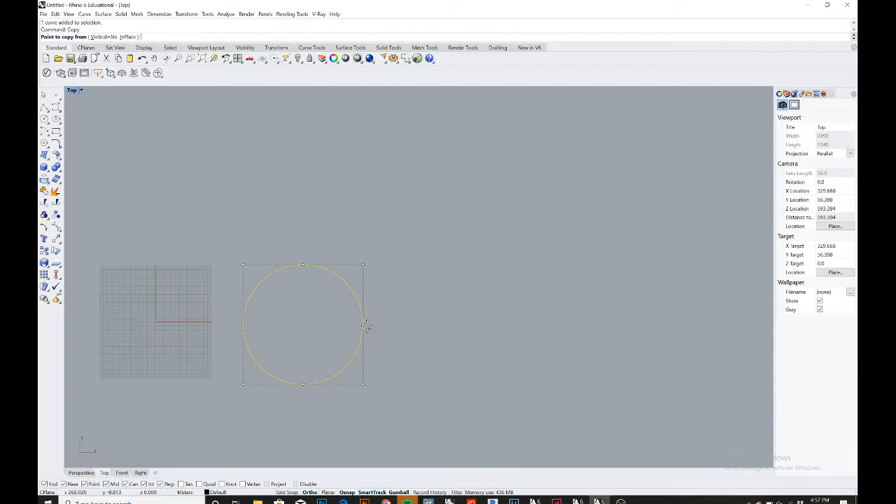And I'm just literally going to copy this 4 times, because I want to have 4 of these circles. I know I'm doing this off the grid, it's alright, don't freak out. Also, we're in top view if you didn't notice that.

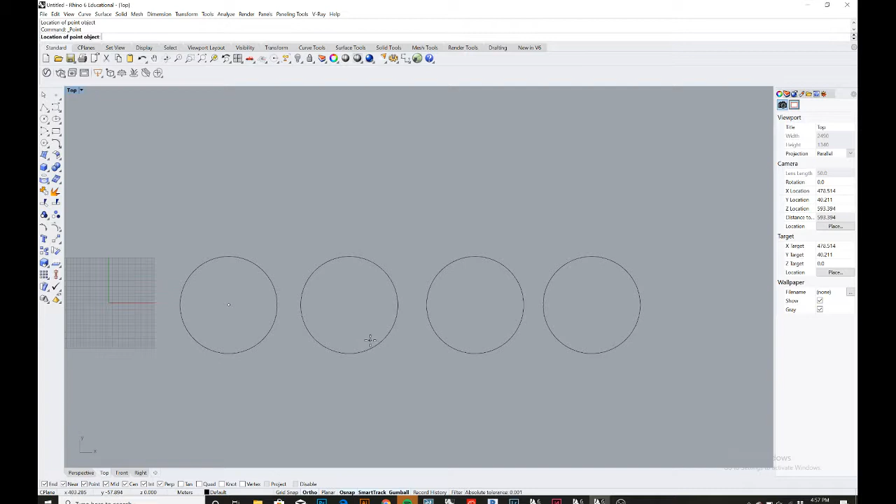Okay, but we might change that around later. Alright, so we have that, and then I'm just going to put a center dot in all of these. If I have my snap on down here, it says center is checked, I can just come in here and hover my mouse around the edge, and it'll want to snap to the center every time. Also, I'm able to do this fast - if you didn't know, if I right click on the mouse, it will just repeat the same command, so I don't have to type in or go over here and click on the point every time. I can just right click.

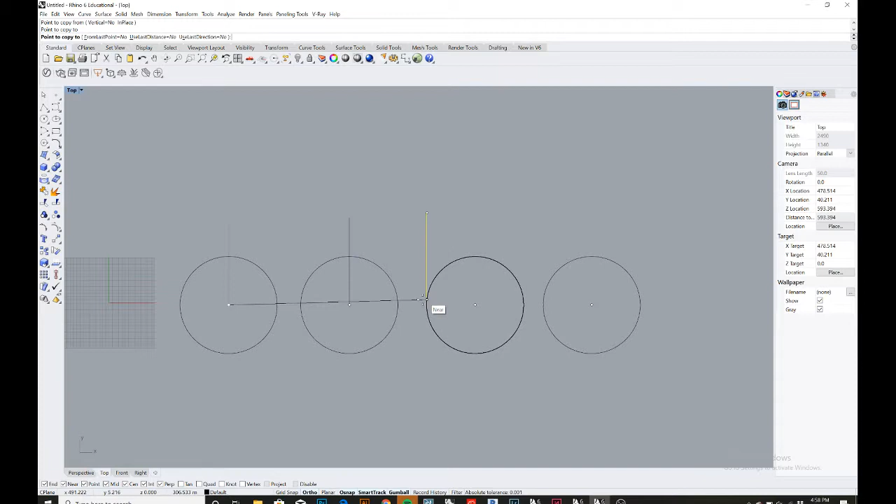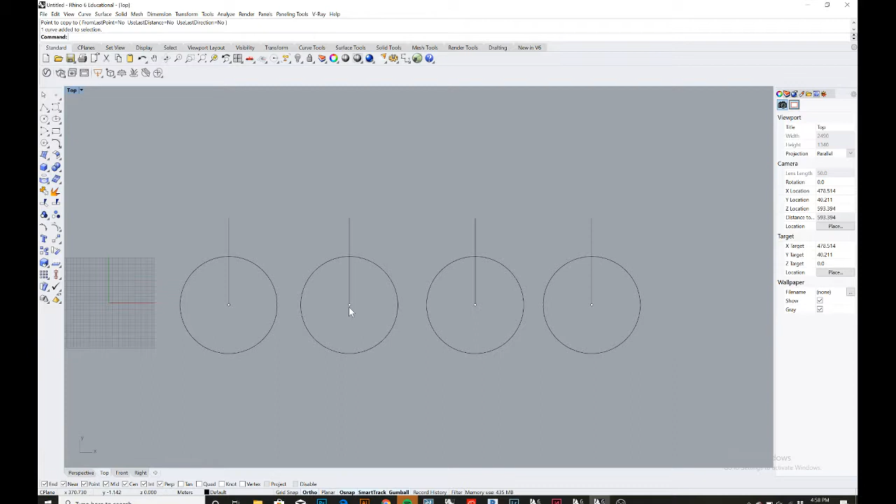Alright, now that that's done, I'm going to draw a line just straight up on all these, and then I'm going to copy this same line over. I like to overextend the line past the circle, just because my ortho needs to be on - that draws a line perfectly straight up and down. With circles, I don't like drawing straight to the edge, because sometimes I might have misclicked and it's not actually perfectly up and down even if my ortho is on.

So it's just a precautionary thing that I do. So then I highlight all this, and then I can just trim this all like that. I just type the trim command, highlight everything, and then select the part I don't want.

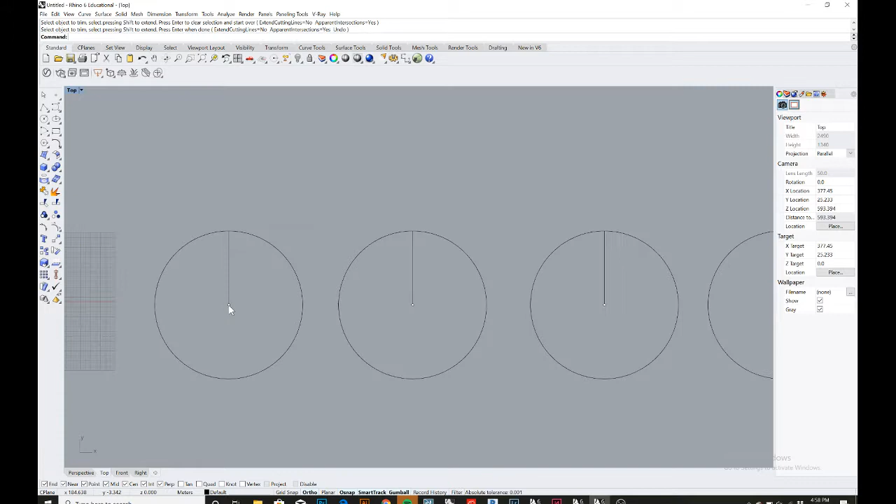Alright, so now we're gonna start messing with these points. So actually, we want 2 points because we're gonna move our lines around. I'm gonna Control C, Control V to copy and paste, and for each one it's gonna be slightly different. For this point, we're gonna move it to the left 3, so I'm gonna type in -3 by just clicking on the red arrow. It's gonna move it a little bit that way, not by much, and then I'm gonna move it down 12.5, so I can type -12.5 to move it down. So now we just have a point over here floating.

And for this one, it's just going to be to the left by 7, so I type in -7. Cool. If I want, though, I can Control C, Control V, so I can keep that original point. That way now I have 2 points. Control C, Control V - that's just copy and paste, by the way.

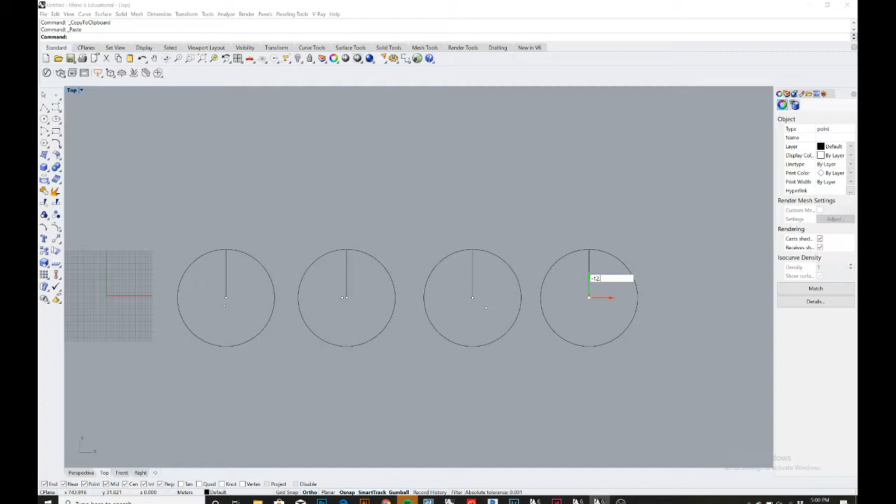And we're going to move this one to the right 21, and down 15.5. Whoops - negative 15.5. Alright, and for this one, we're just going to go straight down, Control C, Control V, straight down -12.5. Awesome.

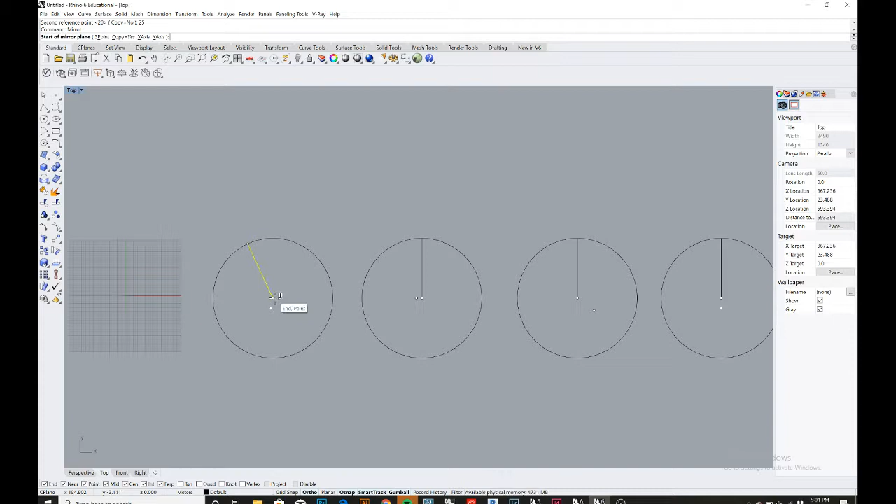From here, I'm just going to rotate each of these. We're going to make basically like slices in each of these. So right away, I can just type in rotate. For the first one, we're gonna click the bottom, click the top, and now just move it to the left, but we're gonna do an angle of 25 degrees. And then I'm gonna mirror that straight up to get a total of 50 degrees.

And then I'm going to join these temporarily. I can just highlight them - I can either click on this or I can type in join.

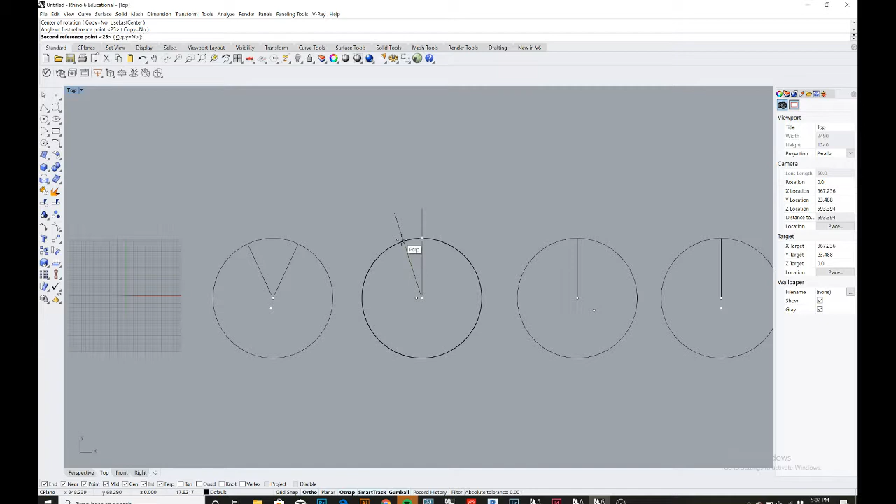For this one, we're gonna type rotate again. This is different than if I used the gumball to rotate it. I'm gonna type it in, click the bottom, make sure I'm clicking the actual top point, and then I'm gonna rotate this one 20 degrees. Same thing, I'm gonna mirror it for a total of 40 degrees. Highlight it, join it. Okay, we'll get to why there's another point over there later.

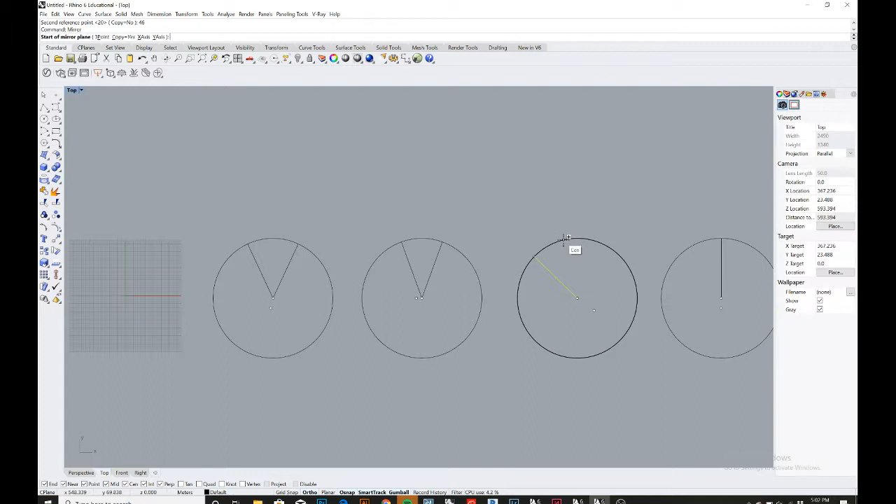Top, bottom. Going to rotate this one way bigger, it's 46, and then mirror it. So a big angle. And then the last one, going to rotate it just 25, and then mirror it, so we have 50.

Okay, make sure these are joined. Alright, so the reason why we're doing that is now we want to move the vertices of these triangles to that new point. We probably have to turn off gumball for this because it's going to get in the way, but I can just click on this point and drag it to where I want.

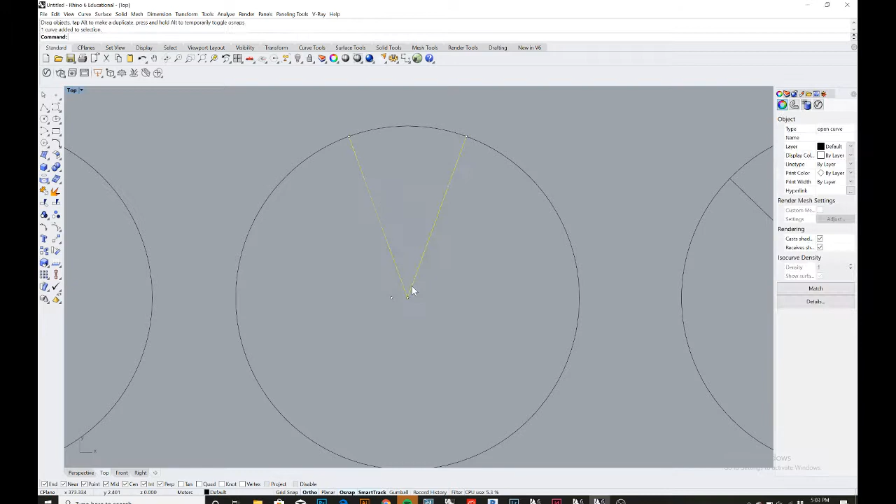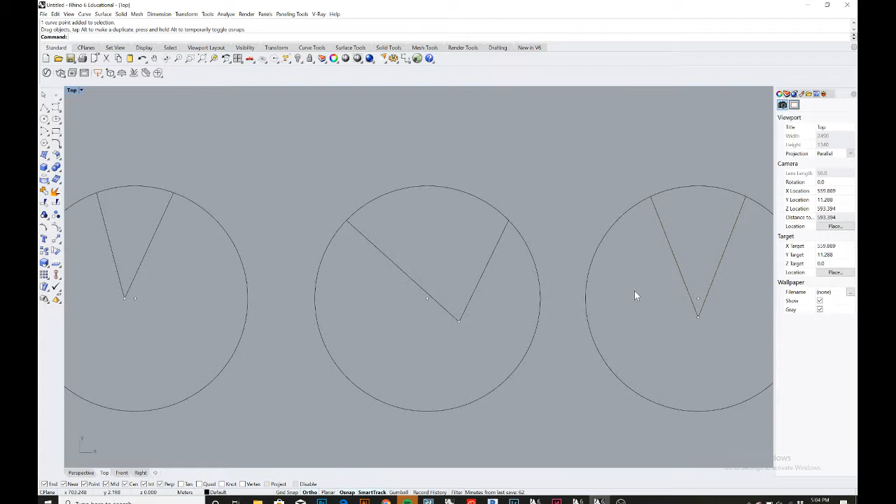Drag it. Just like that. And I think, yeah, that's how it goes. Okay. All right.

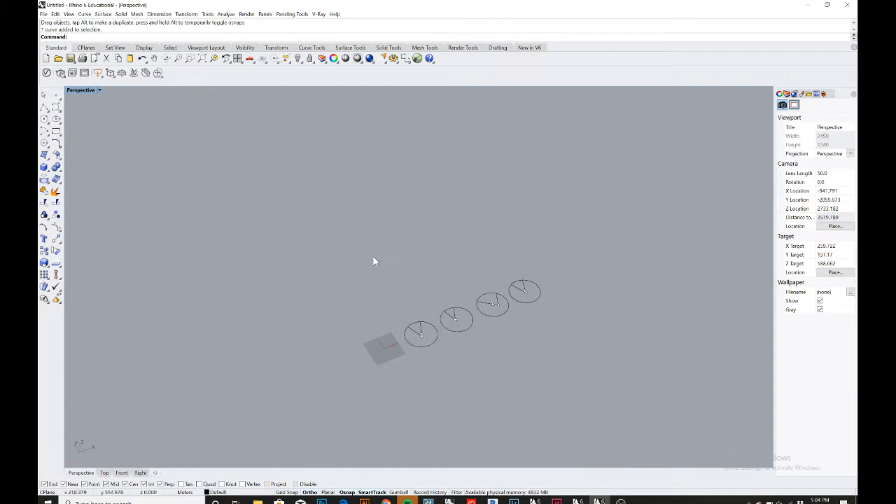And then if I look at this in perspective, I actually want to rotate all of this with my gumball. Now I can use gumball and just rotate this forward like this.

And now we're going to click on these lines. We're going to extend them past so there's intersections. So actually if I highlight all of these and then explode them, and now if I click on them, I want to do scale 1D because we're just going to extend the lines basically.

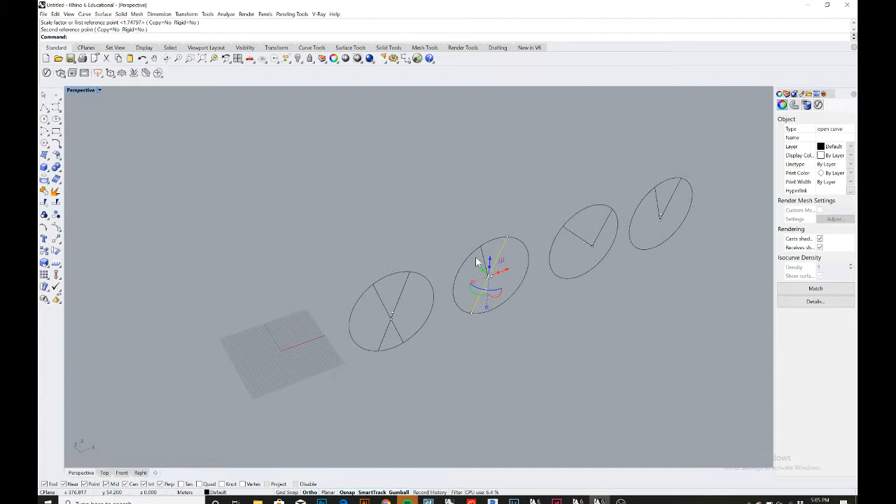Just like that. So how to do that is we make sure we have scale 1D, click the top point, bottom point, and then it should just follow its path like this. Alright.

So I'm just repeating the same thing for all of these. Scale 1D, top, bottom, extend, top, bottom, and extend. Alright, now we want to go back to our circle tool.

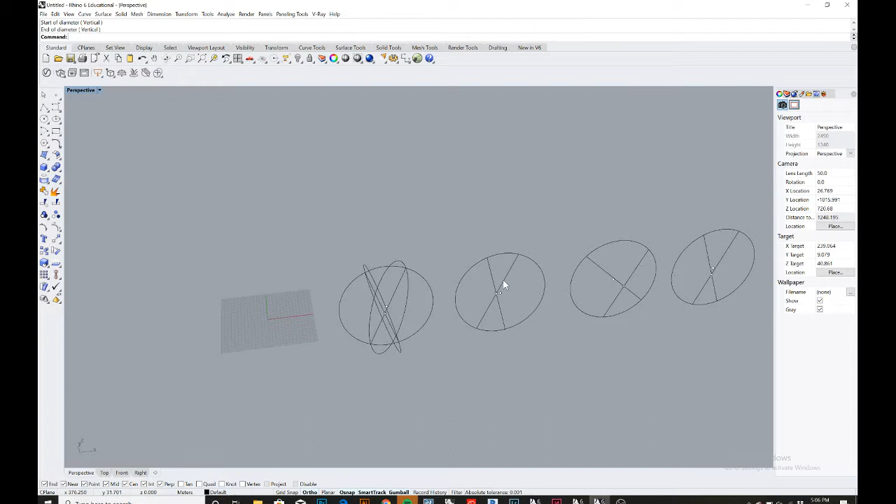Find the one that's by diameter, and we're going to draw these circles in here, like this, basically making a sphere, but it's going to help us trim later. Okay. That's why we rotated these, we extended these lines so it's easier to draw these circles inside. Alright.

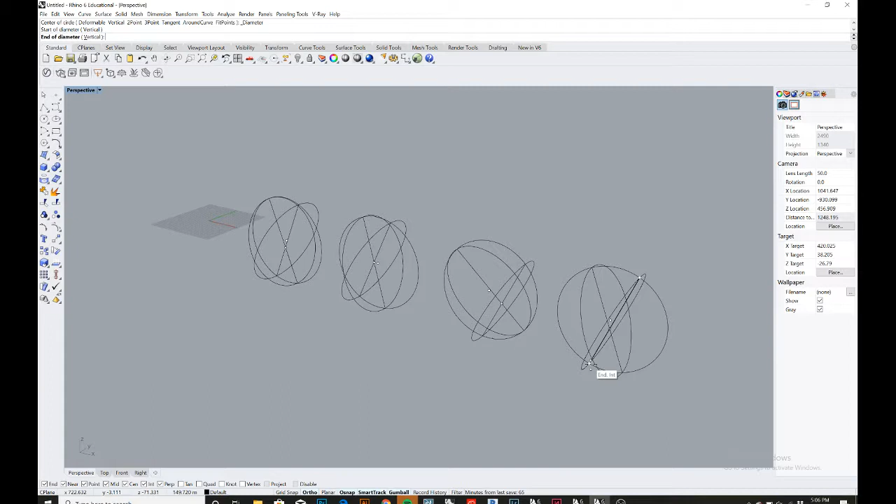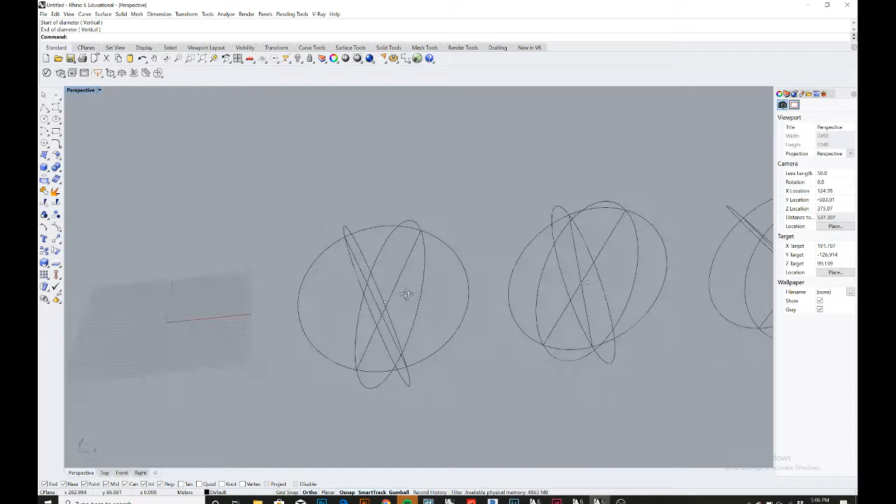Alright, now that we have that, we're aiming to just get a piece of this. It's a little bit confusing, but I'll just show you with the first one, like what the goal is.

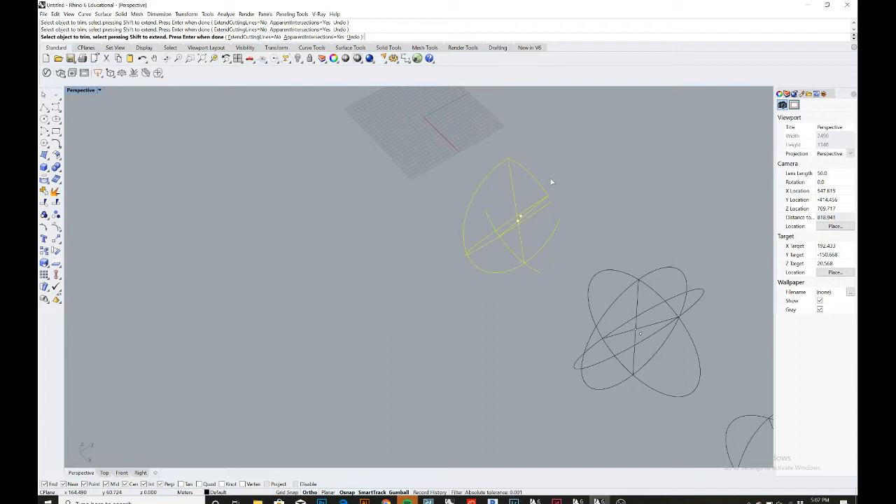If we highlight all this and then type trim, and then we go in and we get rid of that, get rid of that, get rid of this, get rid of this. We're just trying to get a wedge basically. Okay.

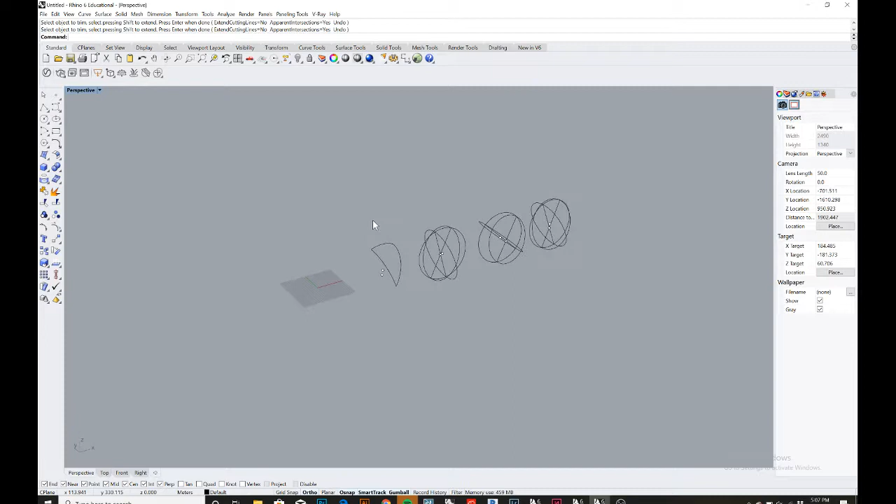Cool. So this is like, yeah, we want to trim until we get that sliver right there. And then we want to make that a surface. So if I go to the surface tool and then click on surface from a network of curves, I can just click on this, click on that, enter, and it will just make a surface based off those curves. So we want to do that for all of these.

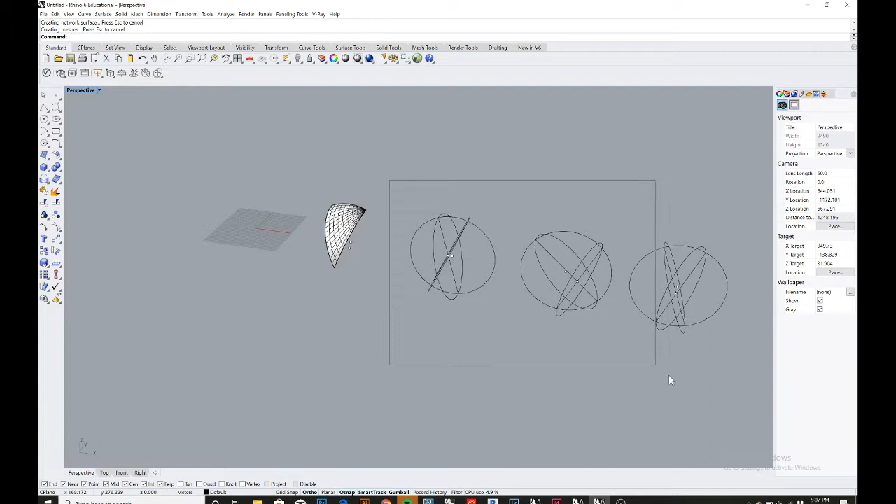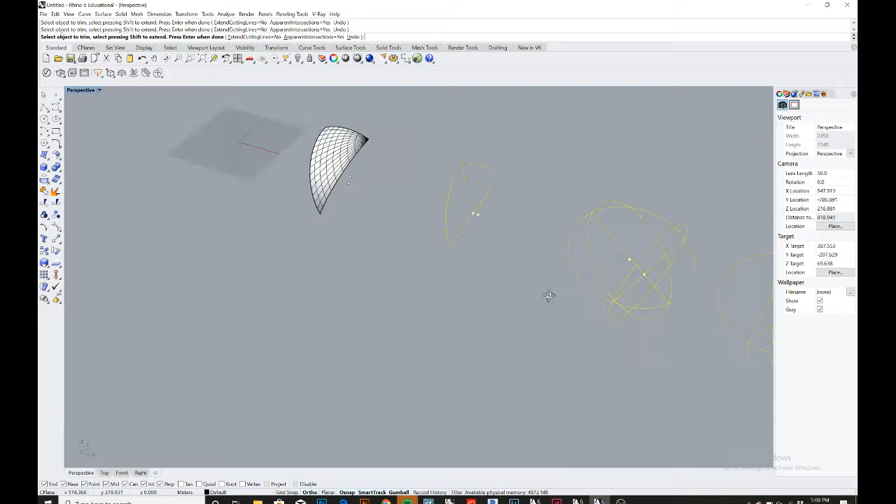So I can probably just highlight all of this and then just go to town, cutting away what I don't want. Don't want that, don't want that, don't want that, not that, not that, none, none, none. Okay.

Yeah, so we got that one done. This one's gonna be really big. So this one is cut like this, I believe. Yeah. Right there, where that intersection is. Cool.

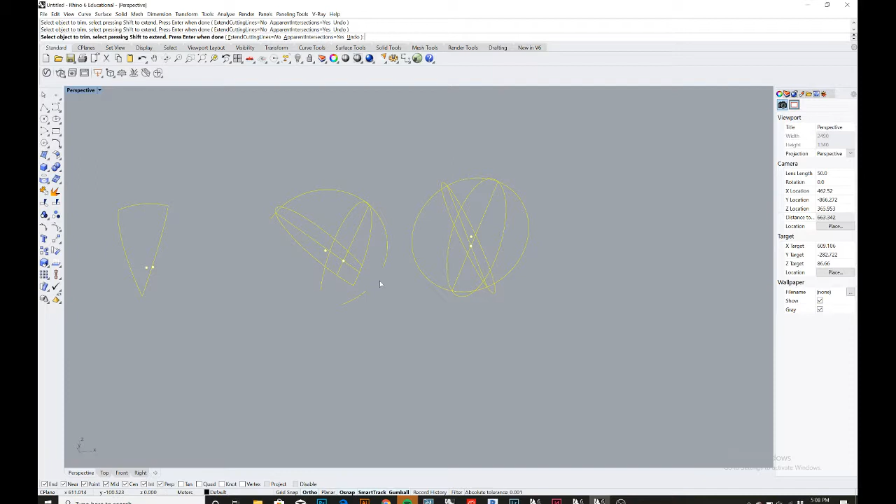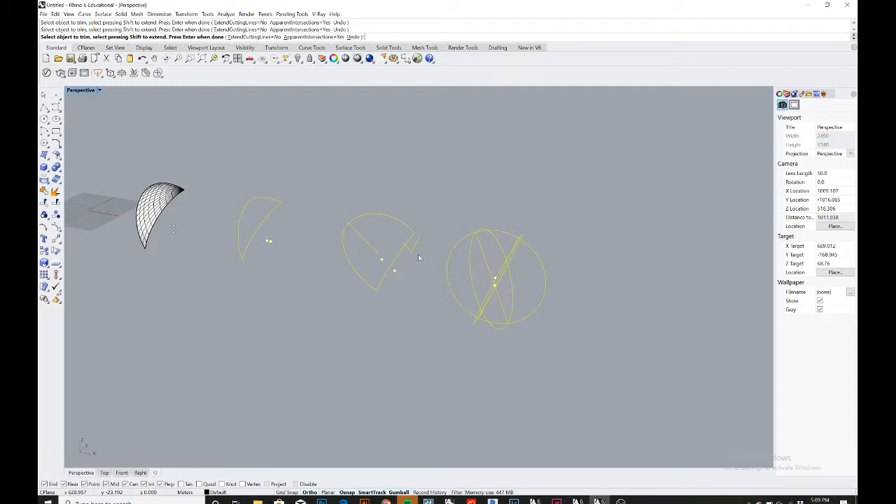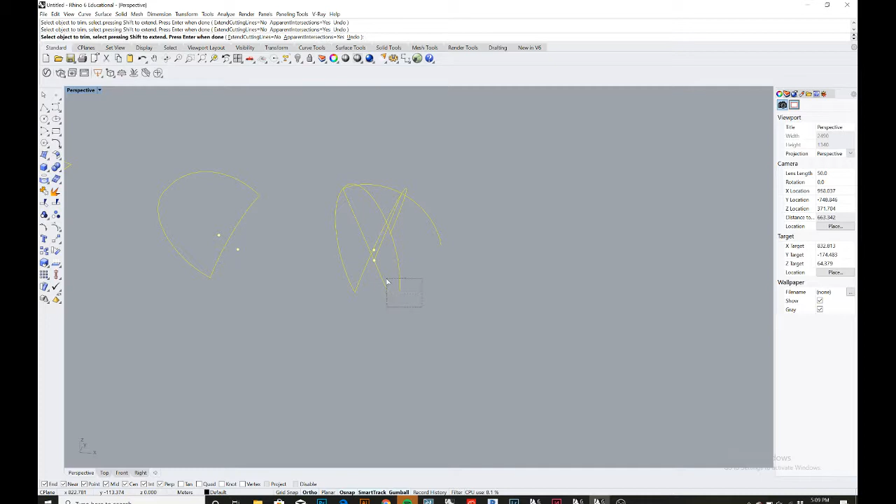Almost done. It can get really confusing, so this might take a couple tries. You might have accidentally deleted a part that you don't want to delete. Just Control Z it, that will help. But there you go. So that's a big wedge, and then now we have this skinnier one right here. Okay.

And that should be... make sure we don't have these little nubs. There we go. Cool.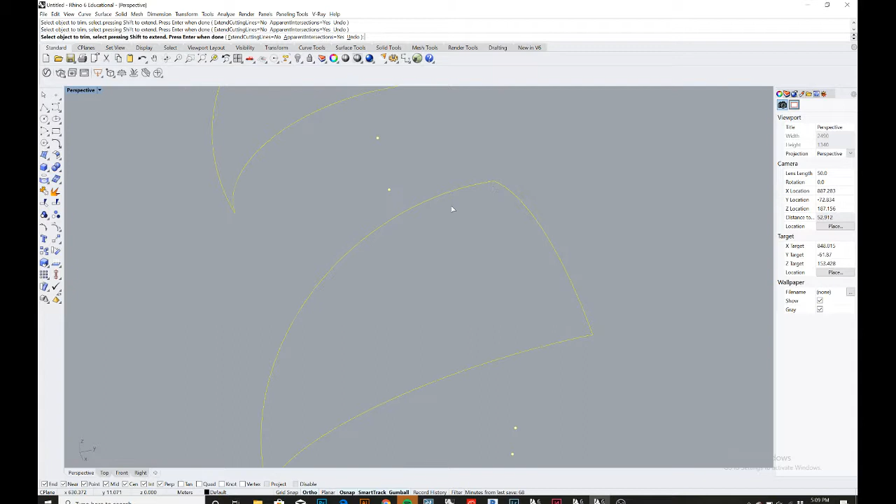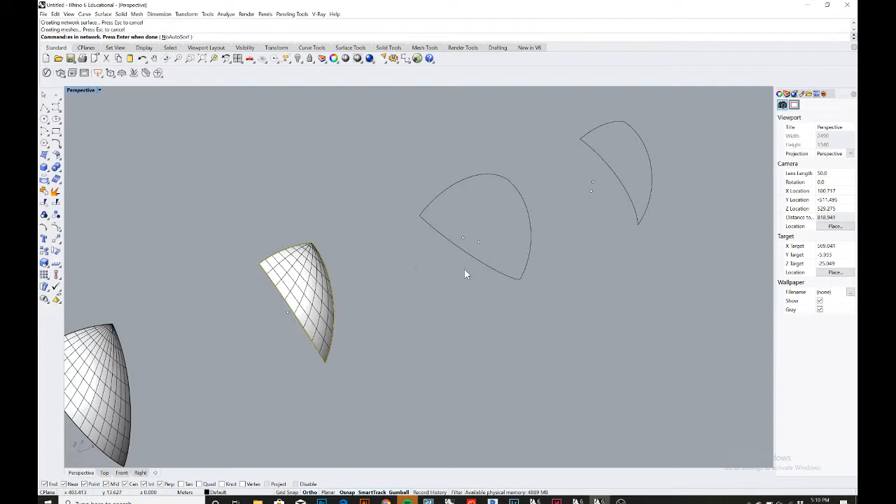That is all done. So now we're gonna make the surface like how we did earlier out of all of these. Surface, the curves, click here, click there, enter. If I right click, I can repeat that. 1, 2, 3, enter. Repeat it. 1, 2, 3, enter.

Alright, now what we do for all of these, I can literally do it all at once. Click them all, and I'm just going to rotate them kind of backwards 25 degrees, and I can do this with Gumball. I don't need to type rotate. I can just click on the red arrow and type 25, and they're just going to rotate like that. That's all it is.

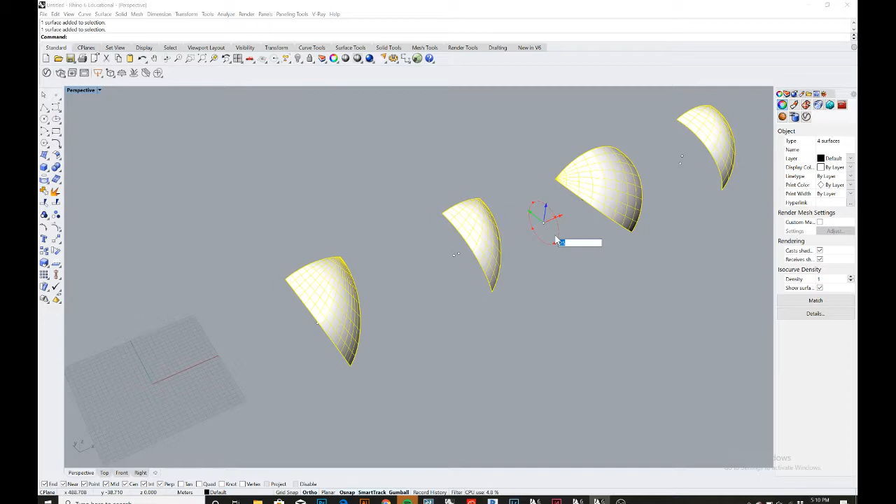Alright, these lines are confusing. We can move these away. We can just pull this forward. Alright, and then...

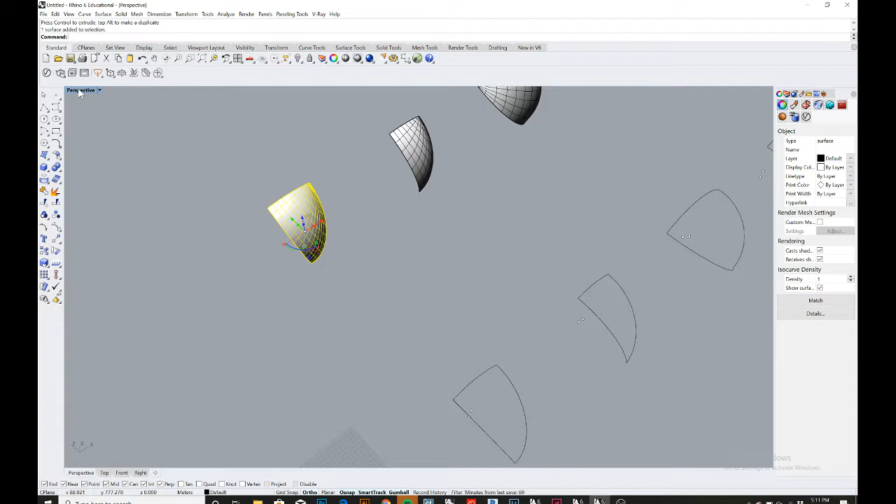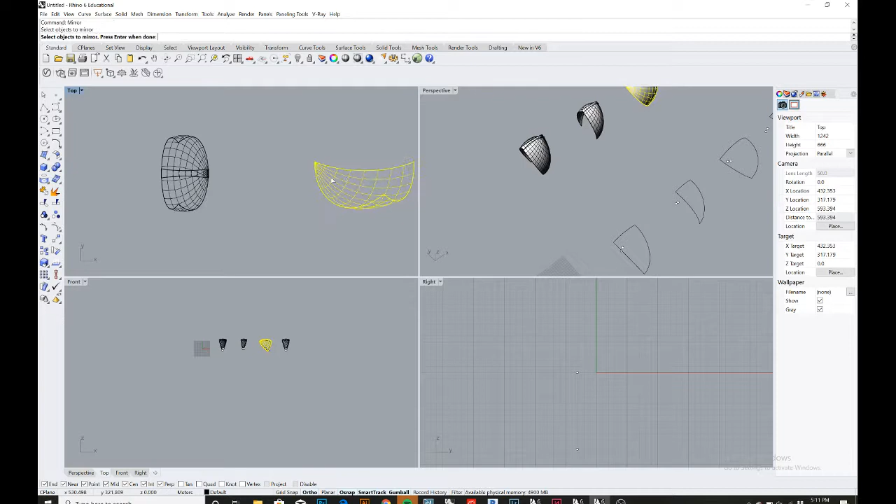Now if I look in top view, this would be easier. We're going to mirror all of these over to make more complete shapes. So if I type mirror, I can go like this, just rotate it over, like this, mirror it over, and rotate it. We want to make sure there's no gap right here, so if there is, we can just move it until there isn't one. There we go.

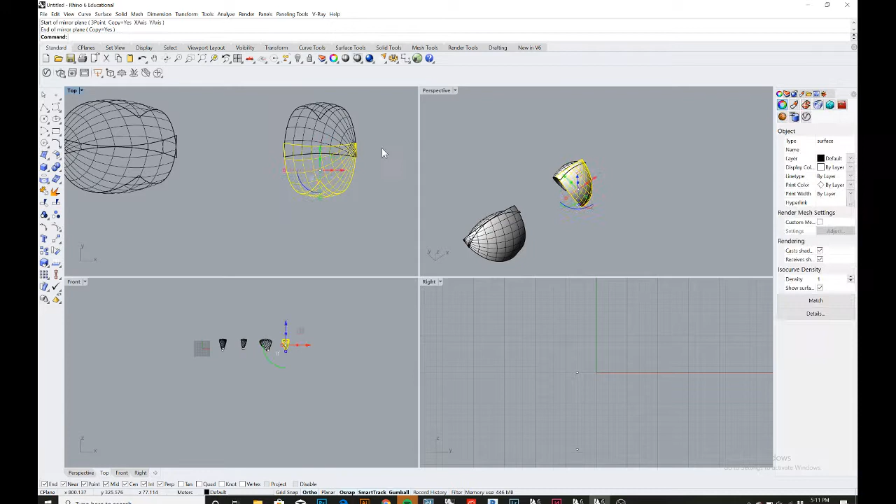And then let's get a better look at this one. Okay, type mirror, and like this. The reason I'm mirroring it so far down is that way there's not any holes. So there's going to be slightly gross looking overlappings like this.

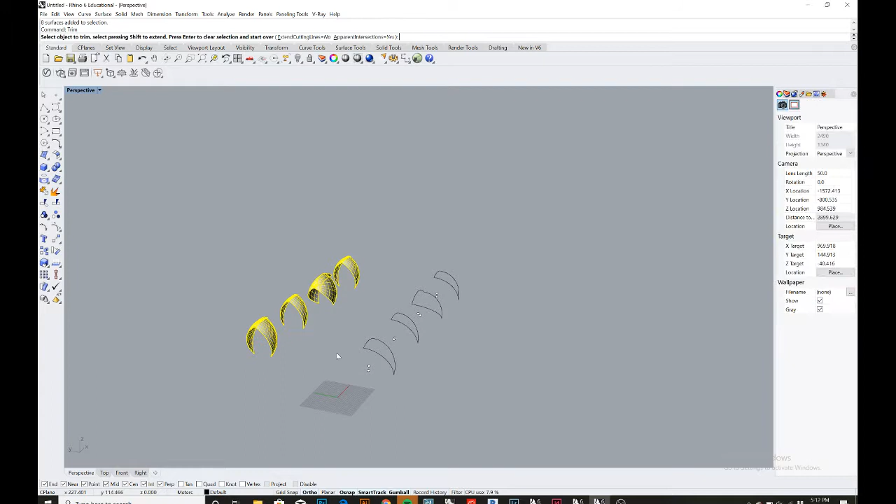But if I highlight all this, I can type trim and get rid of all this excess stuff. It's going to get rid of all these fins that are sticking out basically. So they should be pretty clean by the time you're just cutting off the excess.

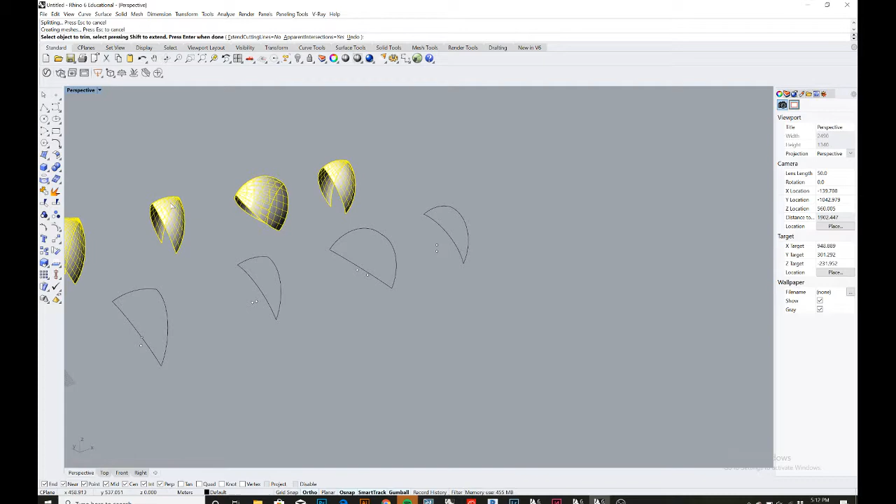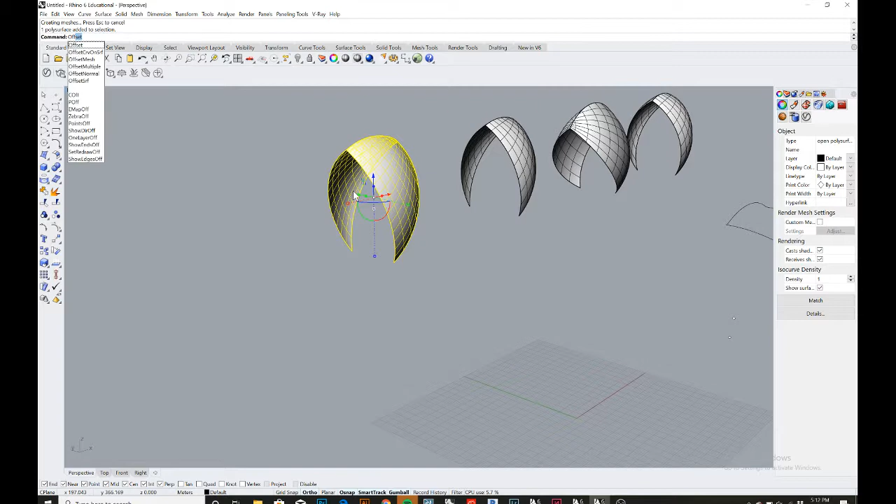Cool. And then if I select this, I type join. Cool. And then now we want to offset the inside surface, because basically we're adding thickness to it. So I do offset surface and make sure the arrows are pointing inside. Make sure our distance, if I go up here and click on distance, it's 3, and I just enter, and it just added some thickness to it.

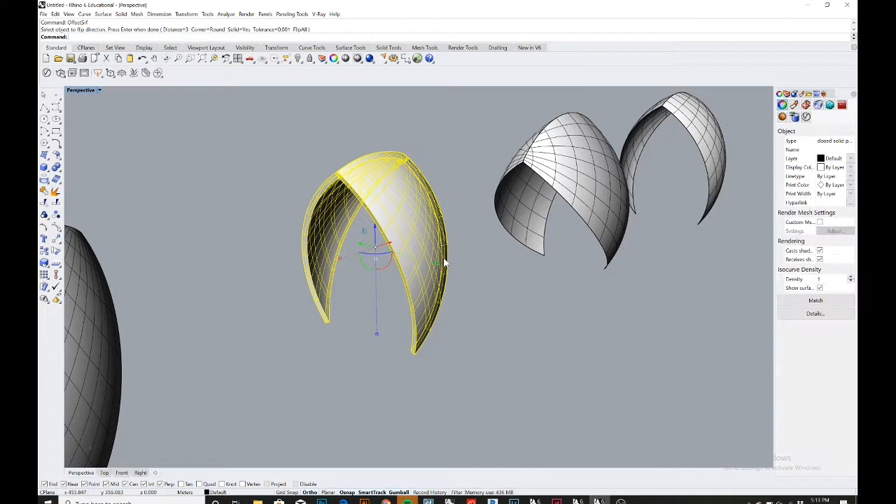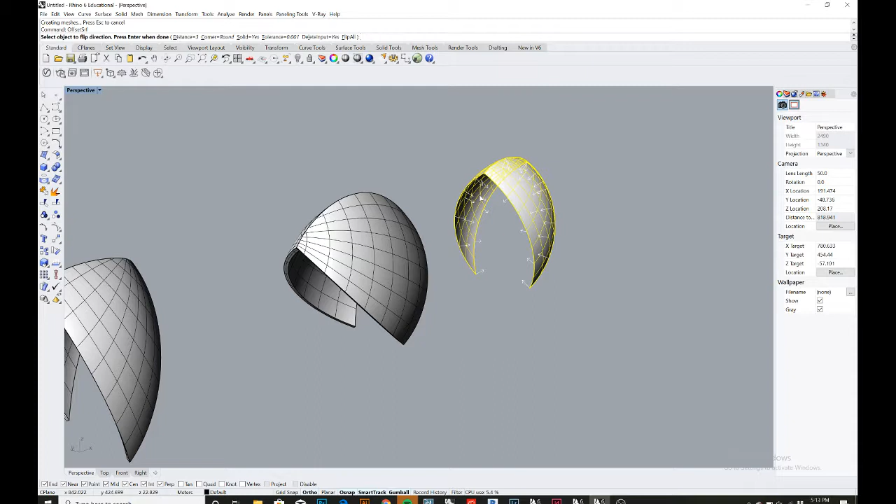So make sure these are joined first. Join, offset, surface, inside, enter. Make sure these are joined. Then offset, make sure it's the inside. By clicking on it, I can just change the direction. 3, cool, that's good. And then same with this. Join it, offset, it's already inside, enter. Alright, now that's perfect.

And now I can bring these closer together to create the shape that we want.

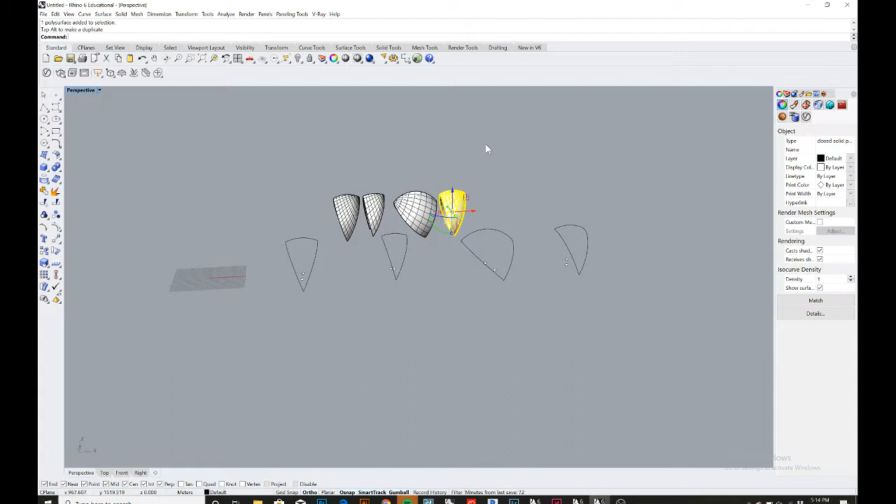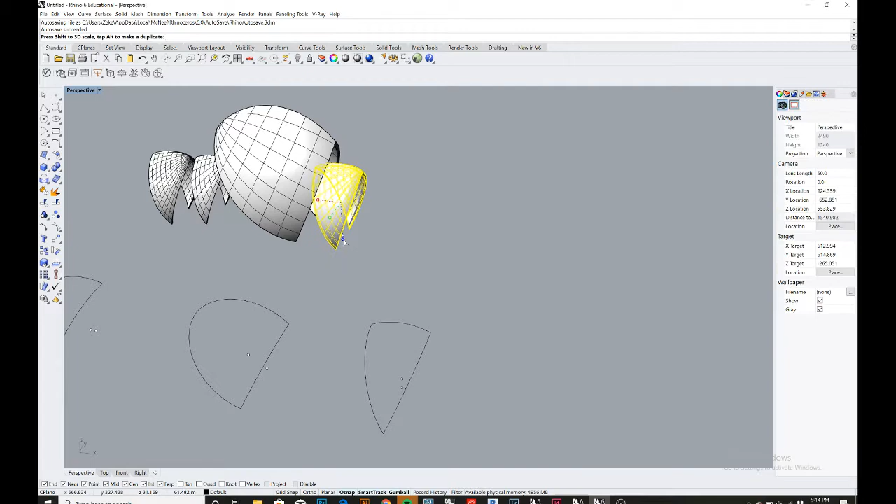And the Sydney Opera House is like, the shapes are changing in size. So if I wanted, I could just scale these up to make it look more realistic. I could lift this up, I could slightly make this bigger, can make this one slightly smaller, this one's slightly bigger. But you can just mess around with it and try to figure out what looks closest to the actual picture or whatever.

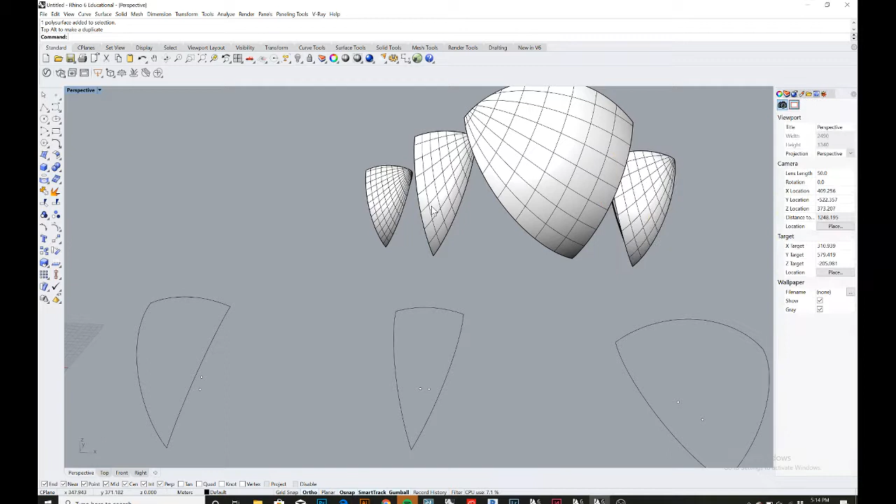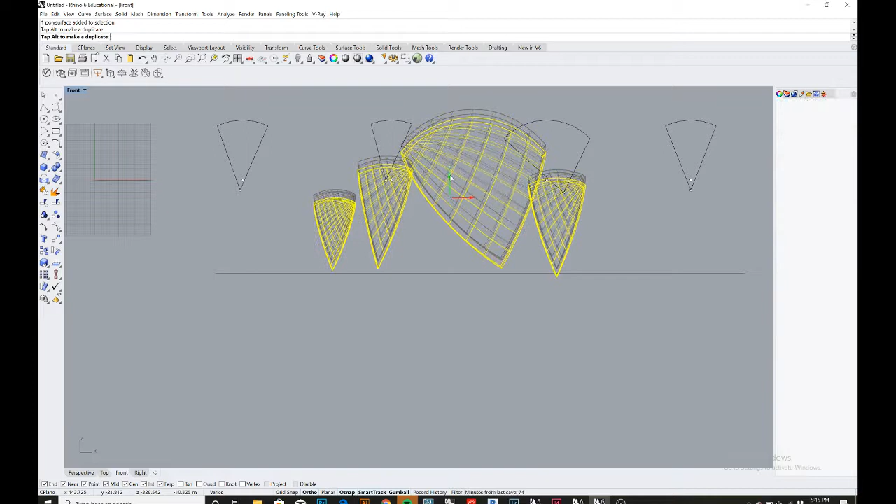Move this over a little. And then if I go to a side view, we can make sure that all these are somewhat actually on the same plane. So I can just draw a straight line, select all these shapes, move them down, and then we can just get them as close as we want to this line, making sure they're all lined up on it. You don't really need to snap it to it because we're going to make a ground that's going to cut off some of this anyway. So, something like that.

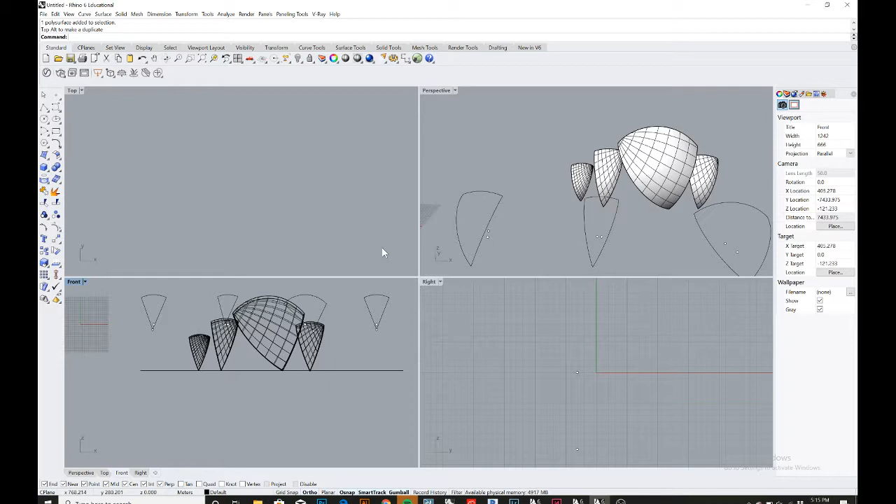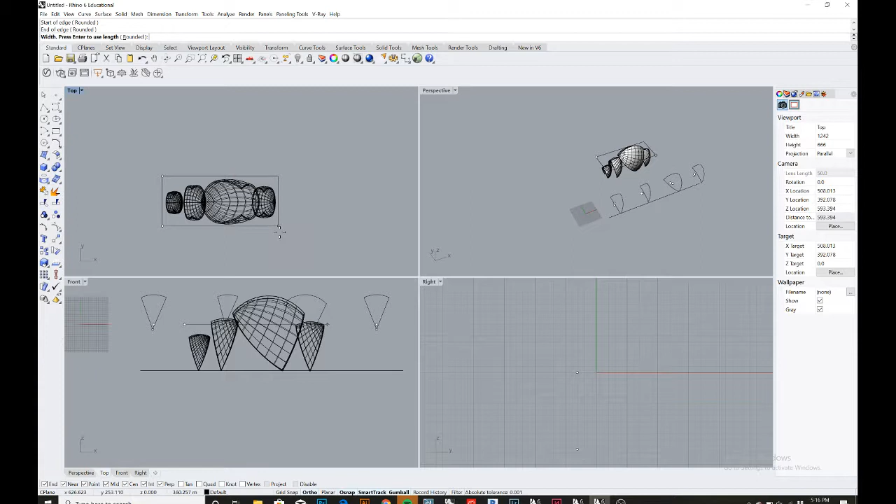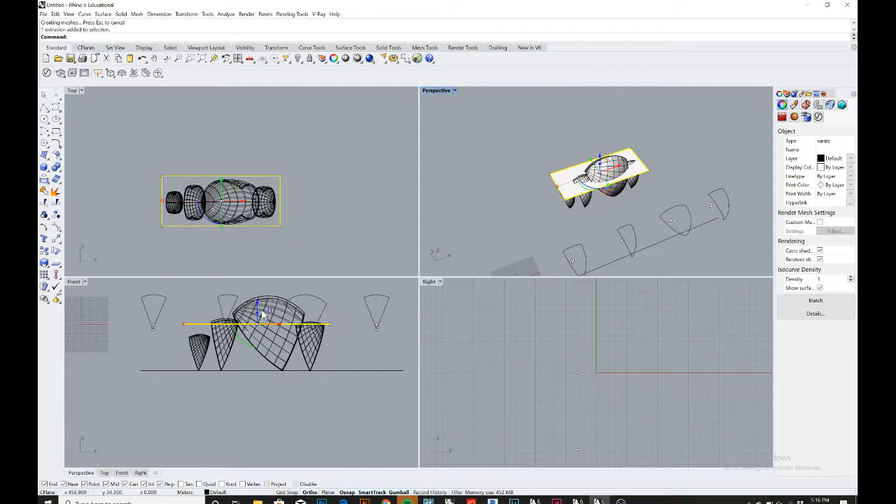And then in perspective, now we can make... actually we can go to top view, and we can make a rectangle around this, extrude it a little bit. Just barely, like whatever we want, maybe like 2. And we can lower this in this view. Can lower this to a degree.

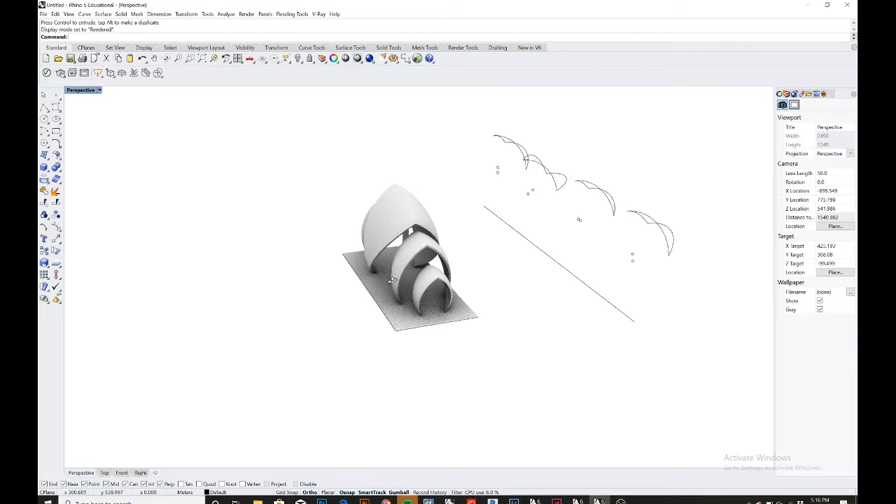And in rendered view, we can see what this looks like. And there you go. My lines are in the way kind of, but in rendered view, that's what it would look like. The super simplified version of this, just getting the idea of the shapes and how you could make them. So that is the basis of that design.